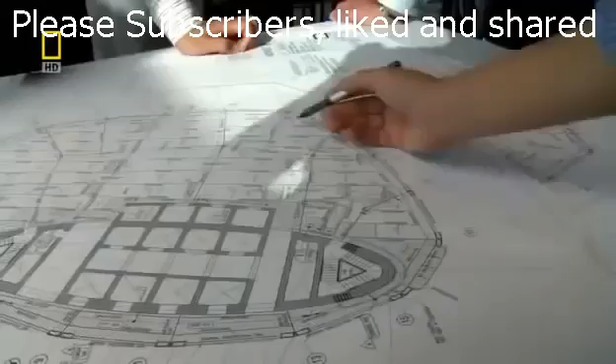Sheikh Sultan signs up a team of architects and gives them a clear brief, not to go bigger or taller, but to challenge the rules of architecture. For Neil van der Veen, one of the concept architects, it's a unique opportunity. The spirit of the times in the UAE was that anything was possible. Really, you could do anything. We can do something in the architecture that will represent that Abu Dhabi is right at the cutting edge.

The architects look for inspiration in Abu Dhabi's landscape. They find it in the wind-swept dunes and the rolling waves of the Persian Gulf. We took this idea of wind and water, which are both dynamic, fluid type of rhythms of nature, and we said, how can we capture those in time? As a result, you get a much smoother phase. I was really very happy when we first saw it, because with such a building, you get the first impression from the first few seconds.

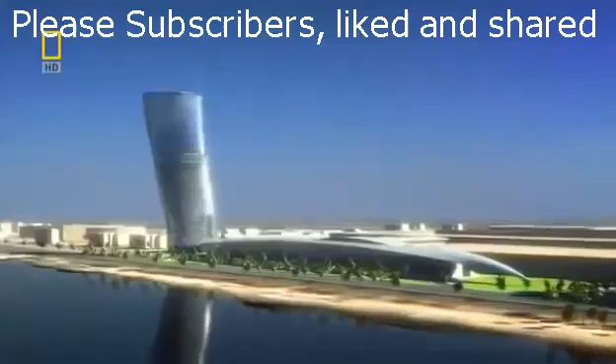The team come up with an extraordinary design. A tower that spirals out of the ground to 160 meters, inspired by a desert whirlwind and the splash of a wave rising over the sand. This gravity-defying skyscraper tilts almost 5 times more than Italy's Leaning Tower of Pisa. No single angle of this tower is the same as another. It's a structure guaranteed to amaze.

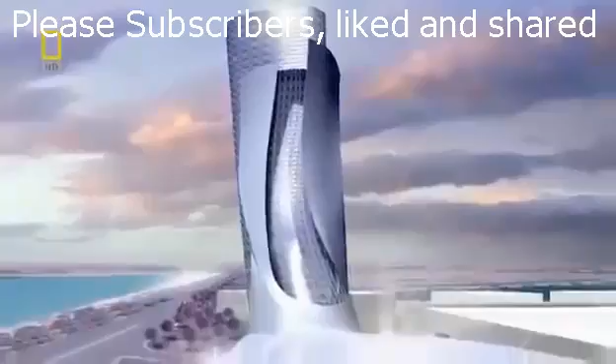We really wanted this to happen. They could see a vision suddenly. They could see something that would stand for them. Then there was no stopping us. Sheikh Sultan wants the lower floors to become the most prestigious office address in Abu Dhabi, with the top 18 levels assigned as a 5-star hotel fit for royalty.

But for maximum impact, this landmark skyscraper also needs a prestigious location. The Sheikh decides the tower will stand next to a monument of national importance, the grandstand. Built by his uncle and founding father of the United Arab Emirates, Sheikh Zayed, it's used to this day for national celebrations. This monument and the skyscraper will link Abu Dhabi's future with its past.

Over the past 50 years, this land has experienced extreme change like no other. The discovery of huge oil reserves in 1958 set the wheels of progress in motion. Abu Dhabi's ruler, Sheikh Zayed, had a vision to unify the sheikhdoms and secure their financial future from Western dominance. He then set about using his black gold to create a city that rose out of the desert.

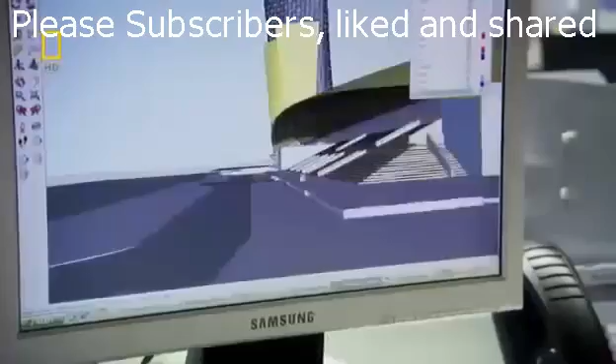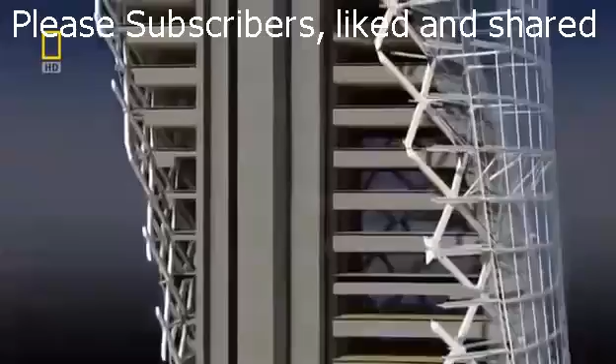Now, the idea must make the leap from the drawing board to the construction site. The only problem is, no one has ever attempted a skyscraper like this before. Everyone realized that this is a crazy structure to build, and how are we going to build it? To make Capital Gate's gravity-defying design a reality, it'll take some extraordinary engineering, and the challenge begins on day one. Its top floors overhang its base by 33 meters, creating huge forces that want to rip the building's foundations out of the ground.

At the construction site, project architect Tony Archibald is daunted by the task ahead. When I first joined the job, I was shown the drawings, and I kind of did a double take, and I wasn't quite sure that I got the correct understanding of the project, and it took me a few moments before I realized what we were about to undertake.

Keeping Capital Gate upright is a huge engineering challenge. There isn't just one solution. To overcome the forces of gravity, it will take a whole range of pioneering techniques. But the task starts with the foundations, deep underground. On one side of the building, the weight is going down into the ground. On the other side, it's being lifted out of the ground. And that's due to the large overhang that we're having to deal with.

The solution requires almost 400 concrete piles that work in 2 different ways. On the leaning side, half of the piles push the overhang's forces into the ground. On the opposite side, the remaining piles anchor deeper into the bedrock. They resist the stretching forces trying to wrench the building out of the ground. Finally, to evenly distribute Capital Gate's forces into the piles, a deep concrete slab reinforced with steel is laid on top. What the foundations taught us is that every single aspect of this building has to be custom engineered.

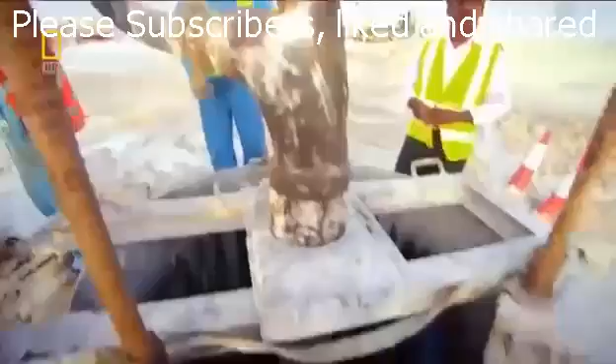Excavators dig out a colossal 6,000 cubic meters of sand. And over 8 weeks, hundreds of piles are driven into the ground. We had an awful lot of piles to put in very close proximity. It was a real difficult challenge. There can be no let-up on this schedule. Sheikh Sultan wants Capital Gate complete by an impossibly tight deadline.

In less than 2 years' time, Abu Dhabi will host the World Future Energy Summit. Over 3,000 delegates from 50 countries and the world's press will convene at the neighboring Abu Dhabi National Exhibition Center. It's the perfect opportunity to showcase Capital Gate and prove Abu Dhabi is at the forefront of innovation.

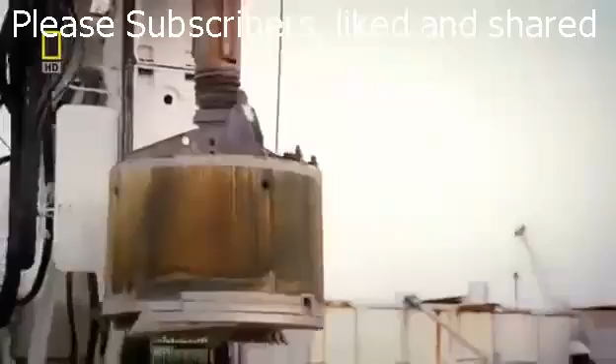But this gives the team just 24 months to design and build a unique skyscraper. With the foundations finished, building above ground can begin. But because of the dramatic lean, it will have to be constructed in a very different way to a conventional skyscraper. We realized once we'd done the foundations that this was going to be the first of many difficult problems. A normal skyscraper requires a solid core to hold it upright. But Capital Gate's curves will just crack and topple a standard core. Engineers must discard conventional thinking and devise a way to defy gravity.

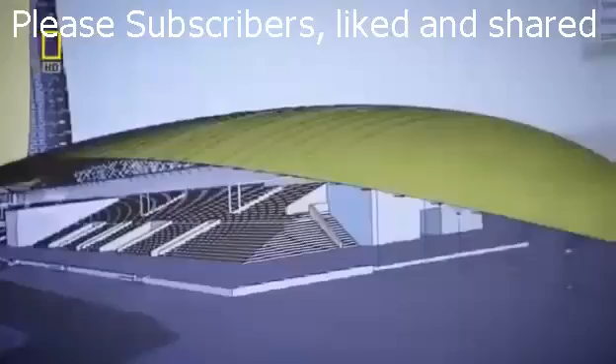Inspired by the nearby desert landscape and its wind-shaped dunes, architects have designed a curved leaning tower. But it'll take some audacious engineering to stop Capital Gate from falling over. Normal skyscrapers are built around a slim vertical core, which helps to channel the building's weight into the ground. There's so much overhang on this building that a conventional core was no way going to work. You just can't build a straight core. It's just not strong enough. Capital Gate's design would cause a conventional core to bend dangerously. The pull of the massive overhang wants to stretch the core on one side, causing the concrete to tear apart.

Structural engineer Mona Vassi knows it's a serious problem that must be solved. When I saw this one, I thought it's impossible, it's not going to work. It's just some sketch somebody left somewhere. But I always think that for the architects, it's easier for them to just draw something, but it's not easy for us to fulfill or satisfy their need.

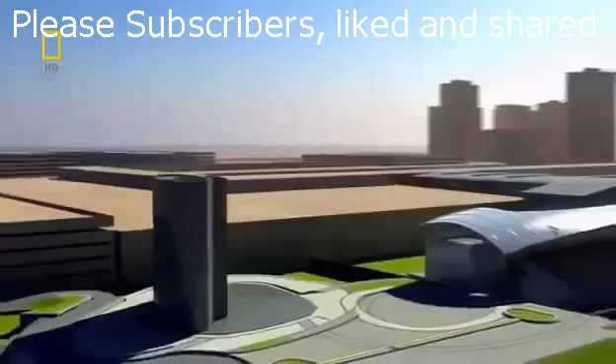The engineers developed two groundbreaking solutions. The first part of their plan is to build the core with a curve, bending in the opposite direction to the building's lean. As the structure grows, its weight pulls the core straight. In total, it shifts 350 millimeters, and the effect is significant. The concrete that would have been stretched by the overhang's pull will now be compressed and strengthened. You build it bent, and then as you add the slabs to the upper levels, it pulls it back into vertical. So basically that whole vertical core is in compression, and that gives it immense strength.

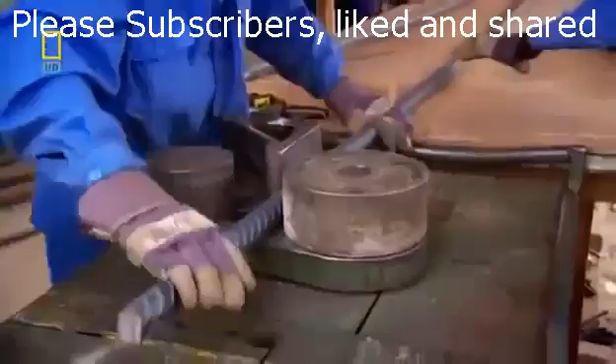The core grows 4 meters a week, and construction manager Les Fairchild is in charge of building it. This is probably the most complex core that I've come across. It's built at an angle, and effectively the core holds the whole building up. The core is built using a technique called jump forming.

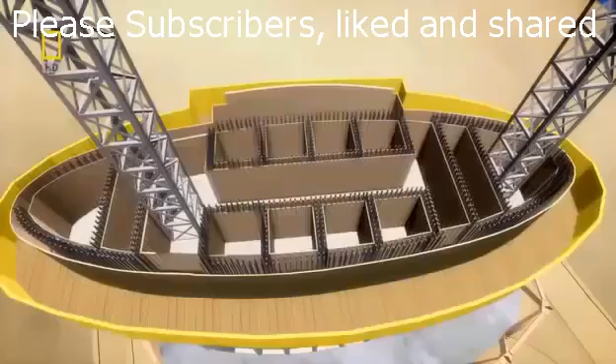First, a dense mesh of steel reinforcement is assembled. A mold then closes around the steel to form the shape of the core. The steel mesh is then filled with concrete. Then the mold or form can climb up the core wall for the process to start all over again.

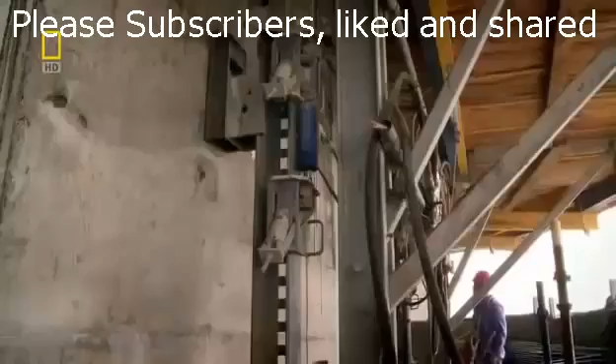Jump form is a hydraulic platform. Once we've cast each 4-metre level, we simply attach it to some runners and we jump it hydraulically up to the next level. The core will be strengthened as it straightens. But for the core to carry extreme loads, the concrete must be reinforced using steel rods called rebar.

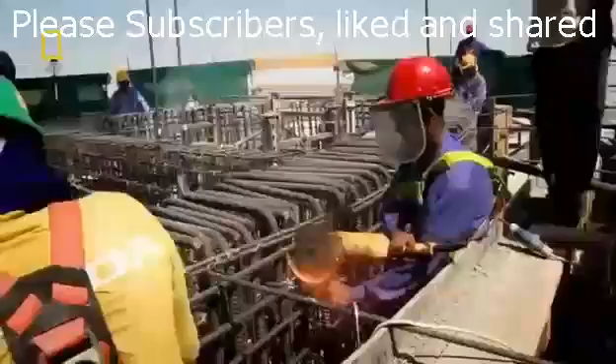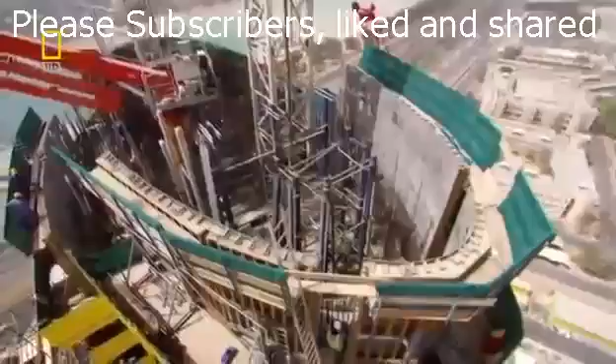The rebar is installed during the daytime, but temperatures of up to 50 degrees Celsius and concrete don't mix. It dries too fast and could crack. To set at the right speed, the concrete has to be poured during the cool of the night.

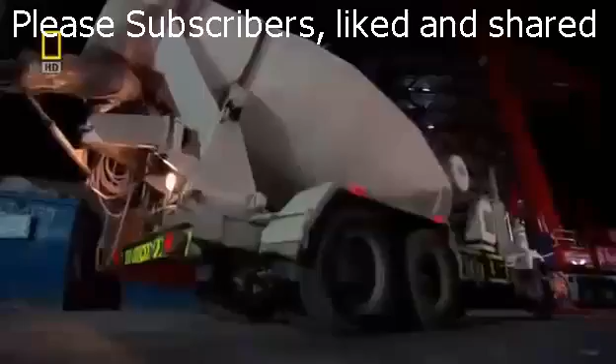As the core grows higher, the liquid concrete has to be pumped over longer and longer distances. So the consistency of every batch is first checked in a slump test to ensure it won't block the pipes. When you first see it coming out the wagon, you can usually tell whether it's a tight mix or whether it's a loose mix, and that's what we're testing for really in the slump test.

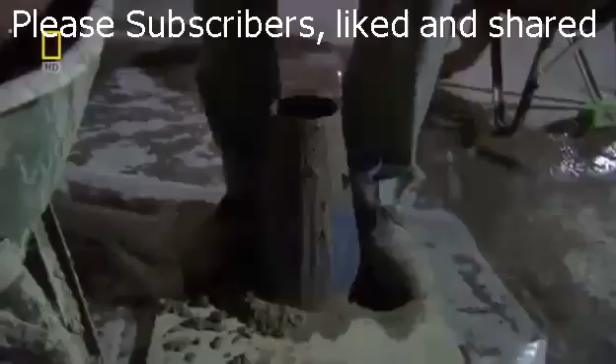We simply make a cone, lift the cone off, and depending on how much it reduces in height, tells you exactly what the slump is. The one we just witnessed is 215 millimetres, which is within the specification, so that's good to go.

Whilst the truck drives to the pump, Fairchild needs to get onto the core. He can take the stairs, but 90 meters up is a long climb. He knows a much faster way. Crane lift.

It's going fairly well. We've had a nice continuous supply of concrete, and we're now pumping it up to the upper levels of the building. And the lads are just steadily working away. They actually work from one side to the other in metre deep layers, so they're doing everything right. It's always exciting when we pour concrete. It means it's another achievement really. We're going up another level.

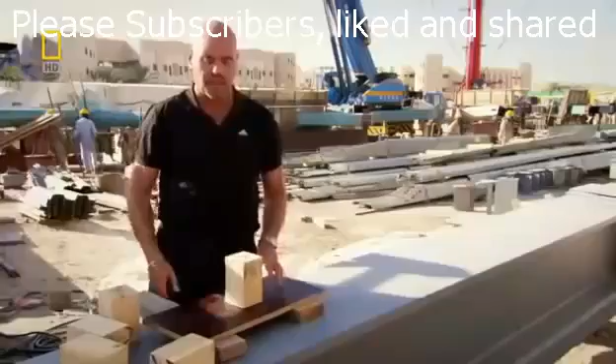But building the core out of alignment and packing it with rebar still isn't enough to stop gravity toppling Capital Gate. What we came up with is a post-tensioning solution where we introduced much more reinforcement into the core wall and then used the tensioning process. Basically that was done by introducing high tensile strands to the centre of the walls.

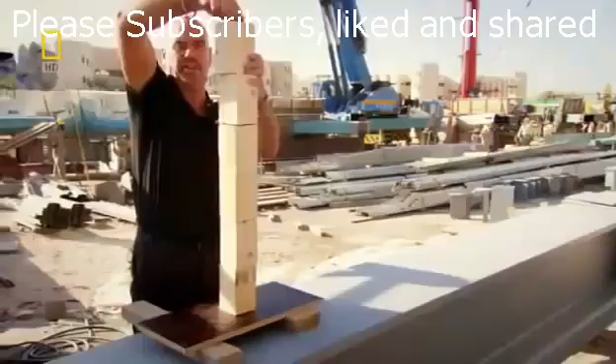When we reach the designated height, we simply apply tension. We're actually stretching the tendons that fall through the wall, and we're actually pulling them tight, and that's done by a tensioning machine. So effectively what you would have when the tension is complete, when the load was applied to the core, it would stay intact, and the additional reinforcement would prevent it from falling over.

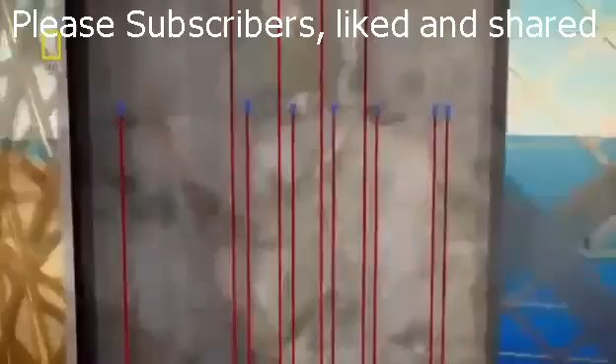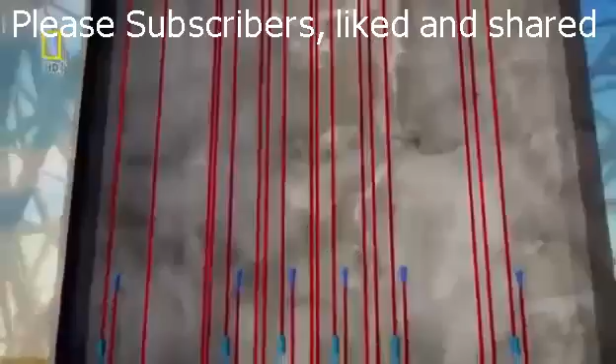To post-tension the core, 146 steel tendons are threaded vertically through the concrete. Each tendon is 20 meters long and runs through 5 floors of the building, overlapping each other for maximum strength. When the tendons are stretched, the stress counteracts the pulling force created by the massive overhang, stopping the concrete from tearing apart.

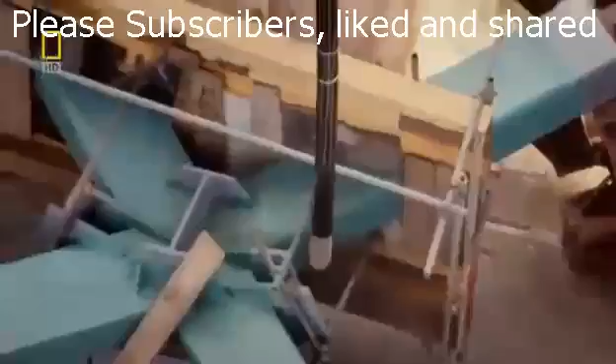On site, the team are post-tensioning the core, but no one has ever attempted this vertically in a skyscraper. The long tendon is lifted to the top of the core. The team used the steel tendon's weight to force it through a duct already cast through the core. Once the tendon is in position, the team lock off both ends, ready to tension its individual strands.

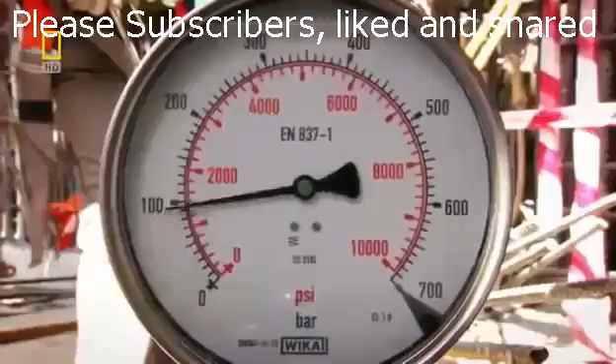Okay. A hydraulic jack clamps around one strand at a time and stretches it. It's equivalent to about 5 family cars pulling on one end of the rope. With the steel tendon now stretched to the right stress level, concrete pouring can continue upwards.

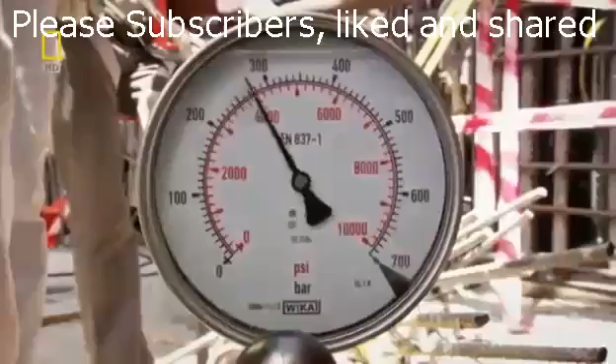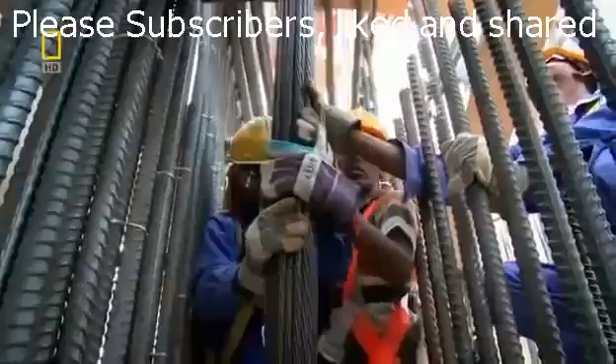The quantity of cable that's been used is approximately 120 tons and 120,000 metres in length. It's about 44 times the Golden Gate Bridge. This process is repeated over and over and means the core should withstand the huge loads generated by Capital Gate's extreme overhang.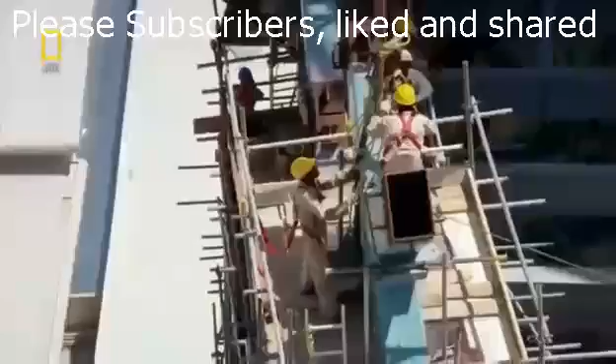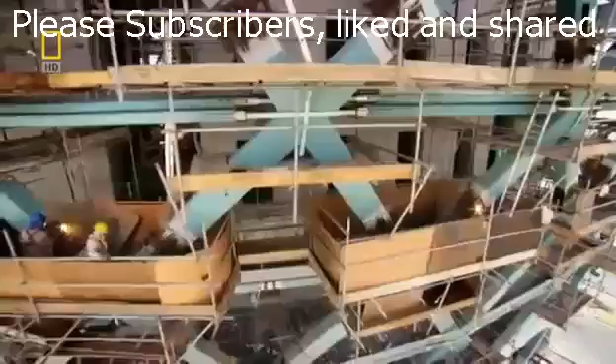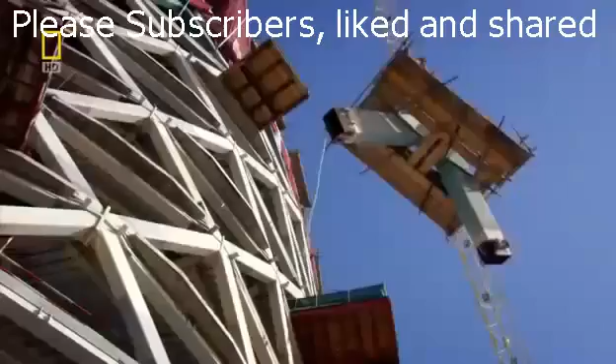But now, an even greater challenge must be tackled. The building's twisting, leaning design must somehow be turned from theory into reality. And once again, it'll mean bending the rules of architecture. To create Abu Dhabi's architectural icon, Capital Gate needs an exterior curved leaning frame. But once again, the building's extreme tilt creates a problem.

The shape of the building with this very pronounced overhang meant that traditional skyscraper building solutions just weren't going to work. There's no way. The building design requires it to be thin to maximize floor space and allow for huge panoramic windows. Irfan Ahmed is one of the engineers who has to find a solution. For structural engineers, always it's challenging to accept the architectural requirement, you know. They always want thinner and thinner and thinner.

Surprisingly, the humble chicken could help with this engineering dilemma. It is essentially a skin of structure around the outside of the building, not unlike an egg. An egg can withstand huge loads because it evenly distributes forces down through its shell, which means the shell can be thin, creating more space inside. So it's very, very thin, it's very, very strong. If I try to crush this egg, you can see that it's actually amazingly resilient. So let's see how resilient.

Here I have 170 eggs laid out, and we're going to put load on top of these in the form of breeze blocks. Moment of truth. So far, so good. Each one of these blocks weighs 15 kilos. So we've nearly got half the weight of a car on here now, on our 170 eggs. Let's see how far we can push this.

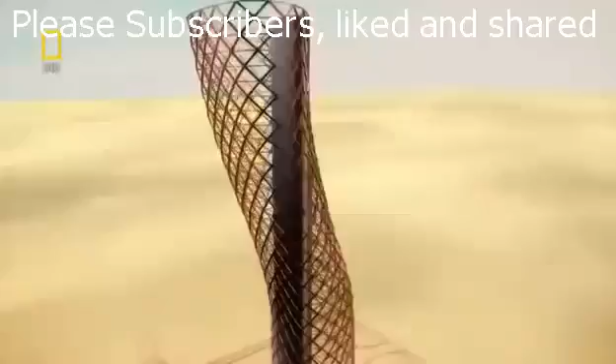Capital Gate can't channel forces with eggshell, but it can use the principle of how it works, using a diagrid. A diagrid is a giant mesh of steel that wraps around the core. Steel beams connect to a node or joint to form a cruciform section. 720 uniquely shaped sections link together to form the thin but immensely strong diagrid. Working together, these cruciforms equally distribute the forces down the outside of the building. The way it does that is by making a uniform net, so that the forces are very evenly distributed, and that means that we can get away with slenderer sections.

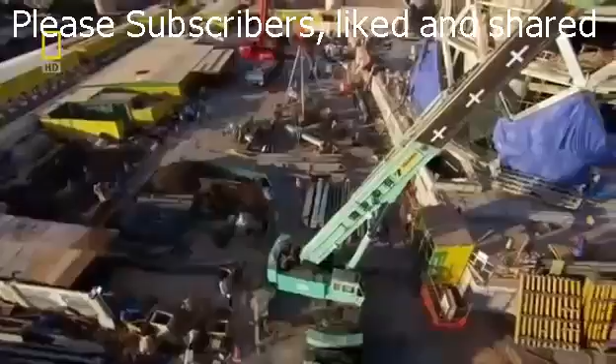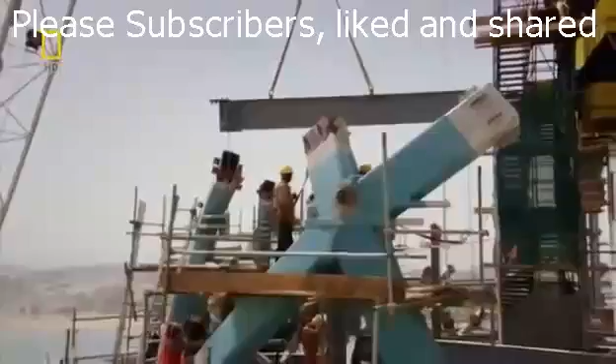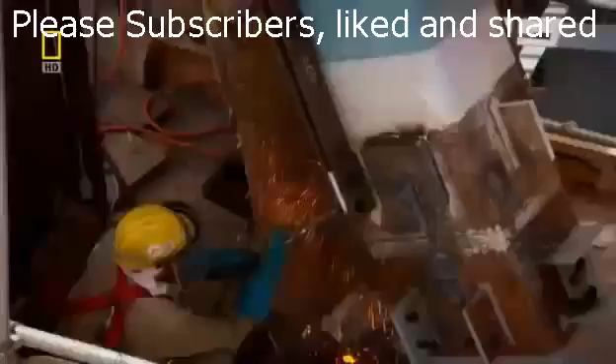On site, a team of 240 steel fabricators assemble the diagrid. They've built the easier straight part of Capital Gate's base, but now the structure is starting to lean, making installation even more challenging. Each cruciform, weighing up to 16 tons, has a unique geometry and must be crane lifted at a precise angle. If the diagrid is not assembled with millimeter accuracy, the mesh will not channel the loads and the structure could be weakened.

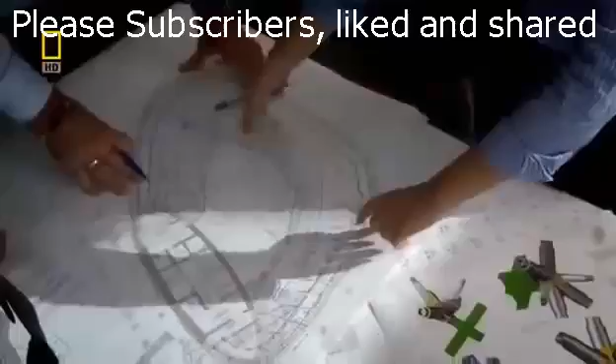The engineers must communicate closely with the expert steel fabricators. They design and manufacture the diagrid 150 kilometers away in the neighboring emirate, Sharjah. Here, cutting-edge construction is the norm. They've built one of Malaysia's Petronas Towers and Dubai's iconic skyscrapers, the Burj Al Arab and the Burj Khalifa. But Capital Gate's revolutionary design pushes even these experts to the limit.

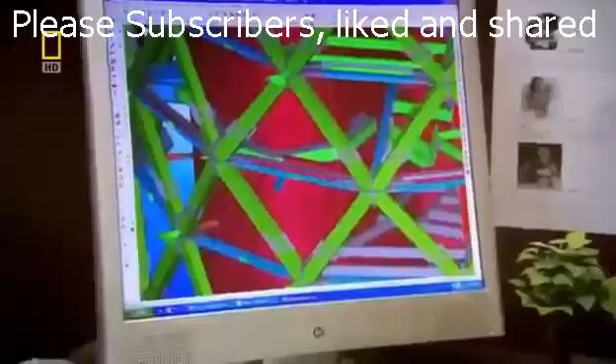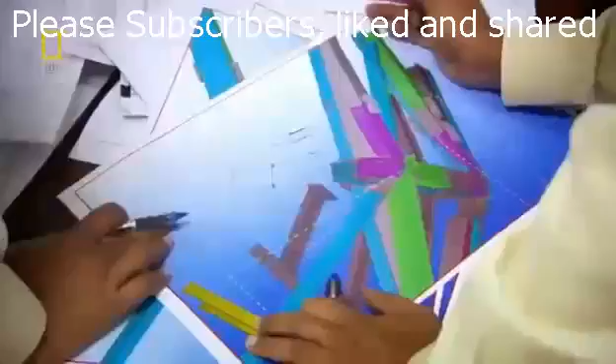On the planning floor, project engineer P. Bhaskaran and his team need bespoke 3D software to tackle the building's highly complex diagrid. The 3D modeling is done, and any unforeseen criticalities will be very clearly identified in the 3D model. Each one of the 720 cruciforms is precision engineered, not only to channel huge forces, but to connect with millimeter accuracy to the neighboring cruciforms and the glass facade. But to measure their exact angles, the team used some old-school technology: chalk. It might look unsophisticated, but it's highly accurate, ensuring all the elements will join together.

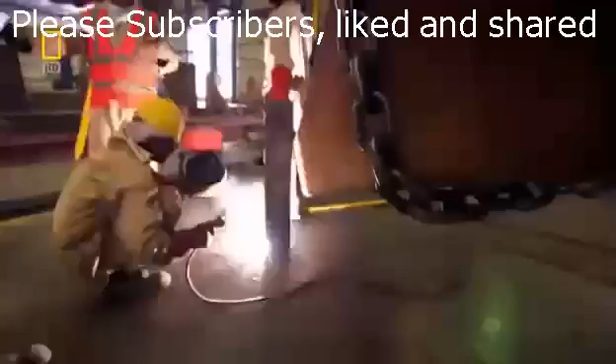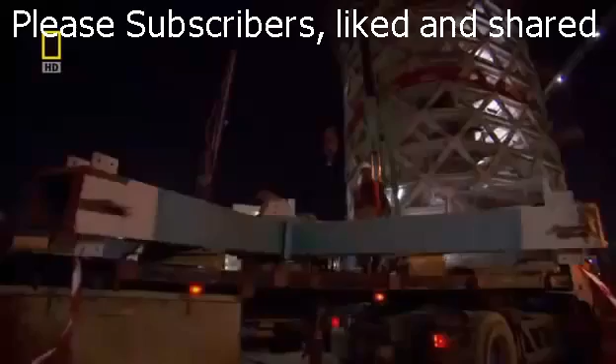To keep up with construction, the factory must produce 18 cruciforms every week. Constructing such a huge building, a critical building within the short span, without working 24 hours, it is absolutely not going to happen. As the skyscraper reaches new heights, the long hours start to pay off. This design pushes the diagrid technology to its absolute limit, and in fact far beyond what's ever been achieved so far. Even in your dreams, you're thinking about this project. So once you see the structure coming up, you forget all the long hours you spend and all the sleepless nights.

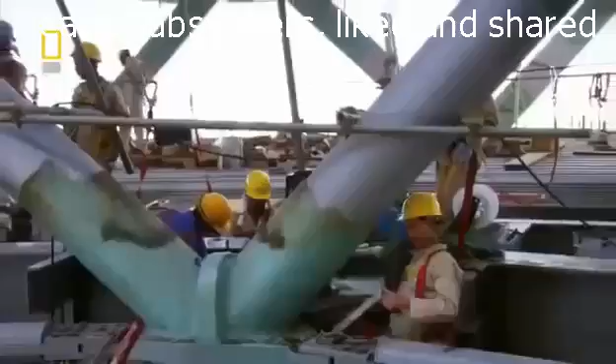A colossus is fast emerging from the Abu Dhabi sands. Now, this leaning tower must be clad with a glass facade. And as always with this gravity-defying structure, it's going to require some revolutionary engineering.

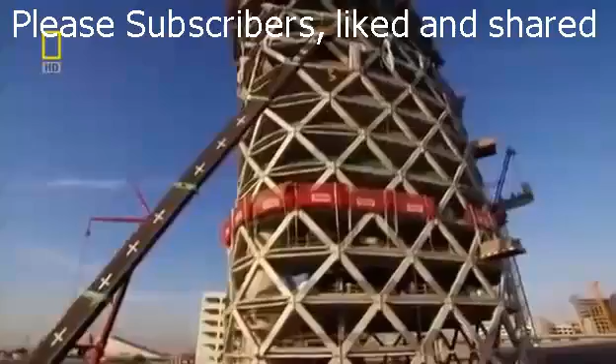Glazing Capital Gate's leaning curved frame is a major problem. Covering its unusual contours with curved glass will blow the budget. So the skyscraper's curves must somehow be clad using cost-effective flat glass panes. Fortunately, ancient Greek geometry can help.

Because you've got a complex shape, it's an organic shape, it's a curved shape, the only way to model that with straight lines is to use triangles. Triangular panes can pivot in 3 directions, and when joined together can cover complex geometric surfaces. But because every angle of the building is unique, it'll take 26,000 triangular panes to form the facade.

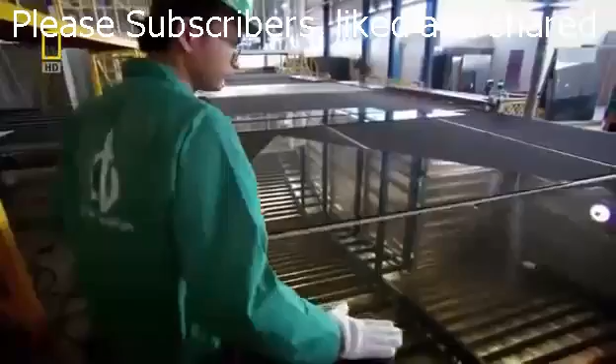With so many glass triangles to cut, the local glass factory springs into action. Each pane is scored by an automated diamond cutter to an exact pattern. The triangles are then sent along the production line. The team is under constant pressure to deliver enough glass to the site.

Hey, this side, you guys, hold it.

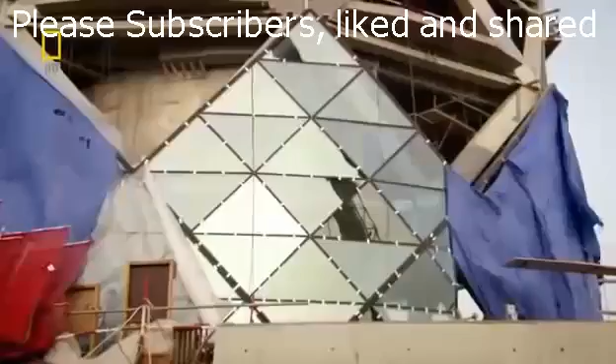After several weeks, 8 diamonds are in place and another 100 standing by. But the glass design is so unconventional, it still has to pass a number of tests to prove it's up to the job. Because we'd already started the glass installation, the results of this test were absolutely key. Each panel is stacked one upon the other. So if we'd had any kind of problem, we would have had to unstack them, which would have had disastrous consequences for the program.

This is no ordinary glass skin after all. Capital Gate's core straightens as it grows. The skyscraper will not stop moving until after completion. Normal glass facades can accommodate minute movements caused by wind and temperature changes. But to stop the glass shattering and keep the building watertight, the panels must be designed to shift by up to 20 millimeters. The scale of that kind of movement is almost unheard of in glazing systems. It's a vast amount of movement.

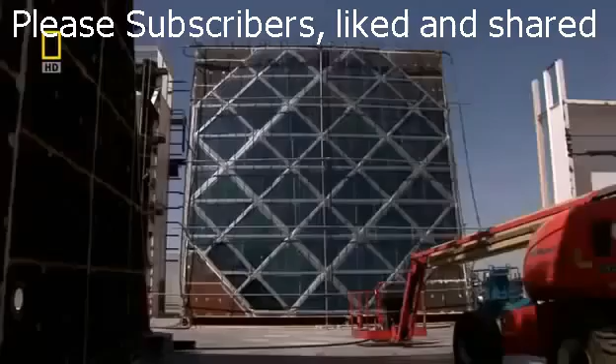With glass installation ongoing, construction manager Craig Rooney needs to know the panels will perform. We don't want to get to the top, we've done it, we've installed it, we think we've done a great job, and then it all leaks. The panels must be tested to the limit at a Dubai laboratory. A plane engine and many liters of water simulate worst-case scenario weather.

Now the moment of truth. Any leaks could be a disaster. And it's bad news. The first time we got a full water test, we had a leak. The fact that we had a leak was devastating to the whole team and very alarming. The diamonds connect to each other by a bespoke two-layer seal. The flexible spongy seal allows the diamonds to move and keeps water out. But if any water does seep through the outer seal, drainage tubes fitted at intervals let the water flow away.

The panel has failed the test. Water has flooded inside and penetrated the inner seal. If it was a fundamental failure, we're back to the drawing board, so the cost and the budget and the program all go completely out the window. The panel is examined. Answers are needed fast. Fortunately, it's not a design failure. They discover a drainage tube is only blocked with sand. The problem resolved, installation can step up a gear.

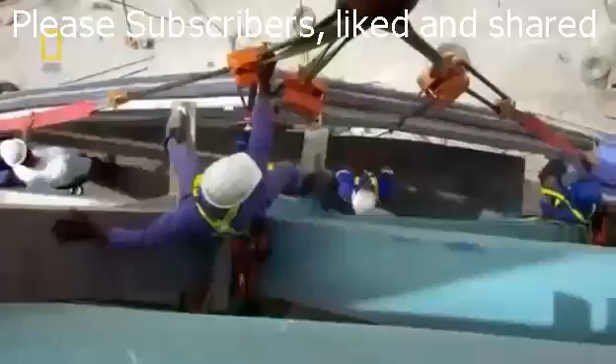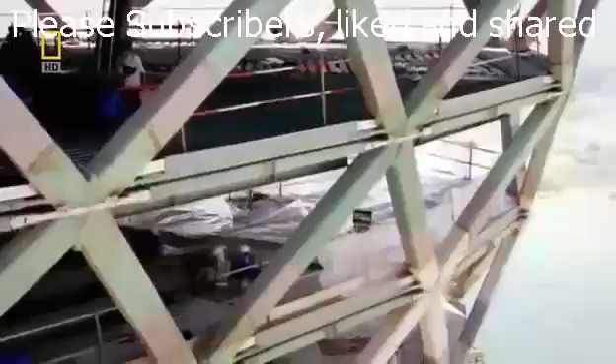But as always with this audacious building, one problem is solved and another is just around the corner. To give Capital Gate's five-star hotel lobby the wow factor, architects again plan to push the design to the extreme. Now they want to build an infinity pool and a restaurant, hanging 100 meters above the ground.

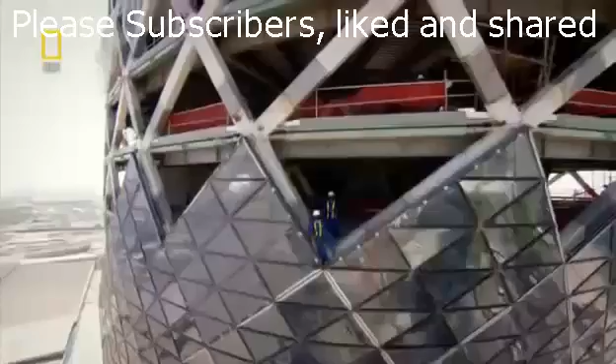18 months into the build, Capital Gate's design is about to give a new slant on high-rise living. The architects want a pool deck and restaurant suspended in the sky, but it's an engineering headache. There's so many requirements that architects have that really put us in so much trouble as engineers, but you want to make sure you have a safe structure.

The design calls for a two-story extension, hanging without any visible support. But the pool's water alone will weigh 150 tons. The structure's huge mass means it needs reinforcement. We needed some supports from below, otherwise there was no other solution. I don't think you can have a cantilever that huge on this building, no way. The design will only work if it's underpinned with 22 steel struts. They will carry the loads back into the building. But the struts must also look delicate to meet the architect's aesthetic demands.

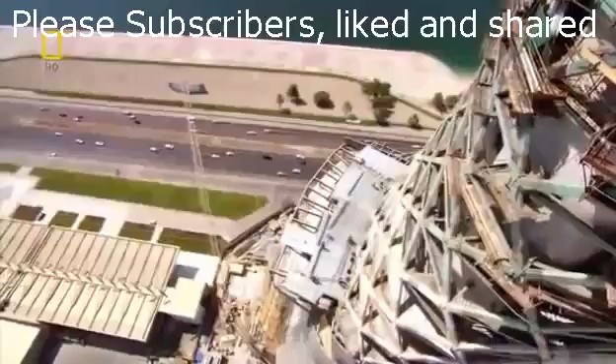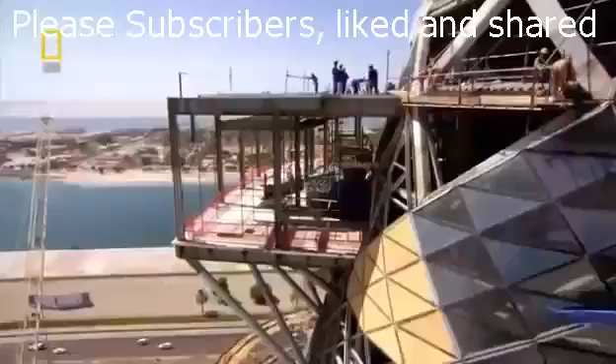On the construction site, 90 meters up, the pool and restaurant is taking shape. All of its structural elements are in position, except one. The team are raising its last 6-ton floor beam.

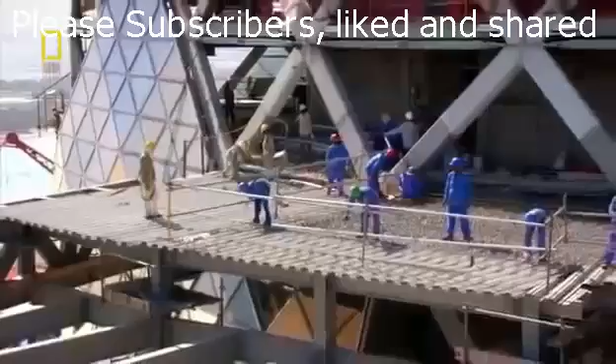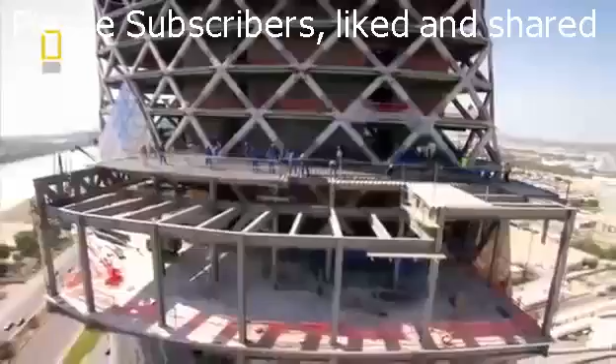It's taken many crane lifts, but one of the highest suspended swimming pools in the world has made the leap from blueprint to building. See all those lines that you just drew? They're actually drawing the same thing for you, but with a crane. But the feeling is indescribable.

And the structure's muscular struts and connections are also elegant. The idea behind these junctions is that they behave like the insects that can walk on water. They're sufficiently light that the surface tension keeps them above the water. So these little brackets dissipate the forces from all that weight.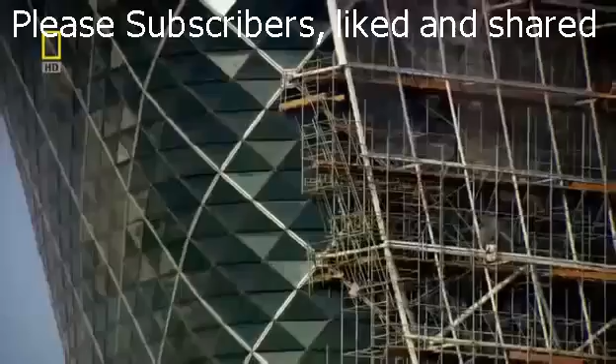Capital Gate is fast becoming an Abu Dhabi landmark. But the taller it gets, the more the weight of its upper floors is a problem. The skyscraper needs to go on a diet. And this time, the architects come up with a clever solution. The building has lots of visual surprises.

And one of the most important ones of those is the internal atrium. It's a kind of a light well that brings light from the sky deep inside the building, and it extends over half the height of the building. So it starts out very, very small at the bottom and opens out in a big funnel. This cavernous hole is good news for reducing weight and minimizes forces.

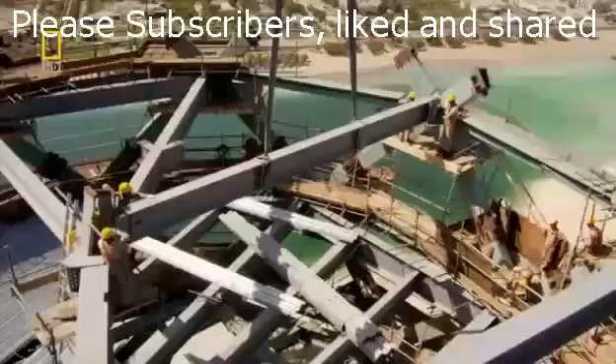But the atrium is a double-edged sword. The floors are critical in transferring loads from the diagrid to the core. A giant hole through 18 floors means these loads must find another pathway. It's a very, very big hole in every single floor plate. So our engineers really had their work cut out.

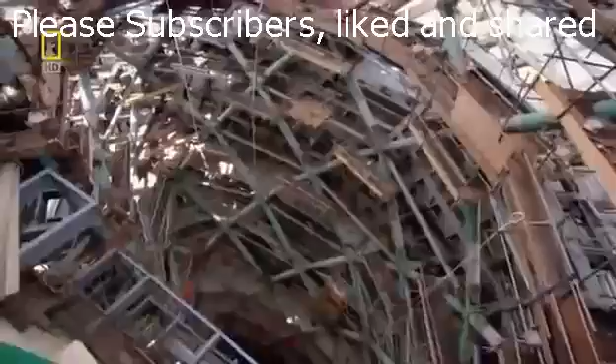You don't want to have an opening in your floor. You want to have more concrete, reinforced concrete, to transfer these forces. The forces need to flow away. And the solution is pioneering. An internal web of steel mirroring the external diagrid. This is the first time we've ever heard of this being done.

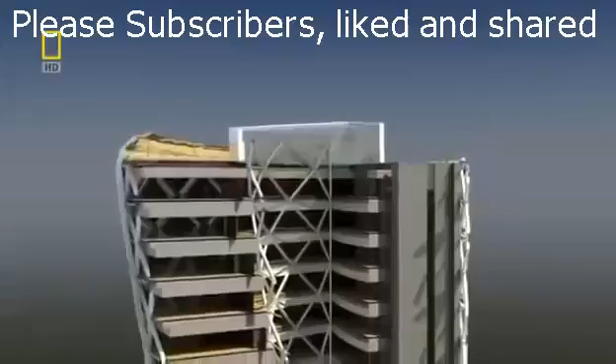The internal diagrid is actually a fundamental part of the structure. This funnel-shaped internal skeleton carries the forces of an 18-story building down to its tapered base and into the core. But the loads are extremely high for such a small area. To stop the atrium punching through the core wall, the concrete needs protection.

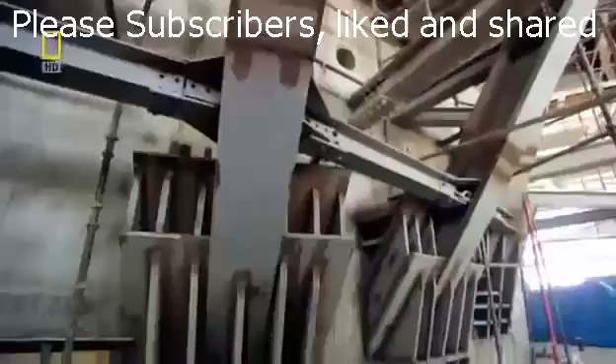The answer? 6 giant plates of steel that brace the connection to the core wall. The connections are really a wonderful, wonderful piece of engineering. They're 8 meters high. They span 2 floors, and they connect back into the core. The atrium's near completion brings Abu Dhabi one step closer to achieving an iconic landmark.

But as the sun goes down, this isn't the only celebration underway. On site, the Indian steel team are holding an annual blessing to the Hindu god Lord Vishwakarma, the protector of architects and engineers. Their livelihoods depend on staying safe, and although they use safety equipment and are highly skilled, working with huge sections of steel at height is never risk-free.

We pay our respect to God and get the blessings from the God. We do that for the safety of all our workers and for the proper completion of the job. Every trade of workers we take, the basic tools they are using on site, that has to be kept in front of God, and the workers feel themselves that they are in safe hands. The tools are now blessed, and the steel team's morale is high.

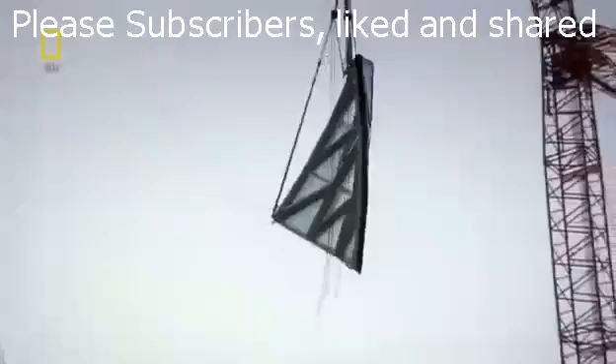Meyer has to act quickly, or this 4-ton diamond could smash into the building. Not for the first time, lifting glass is delayed by changeable weather. At this rate, Meyer won't install the remaining 107 panels in time. But Abu Dhabi's wind isn't the only problem the Capital Gate team face. A last-minute design request comes in from the Sheikh's office that could have serious implications.

With just 6 months to go to completion, the Capital Gate team should be on the home straight. But those plans may have to be put on hold. I had a telephone call saying that we had to put a helipad on the roof, which I didn't think was a joke, but I was astounded that we got this at such a late point in the project.

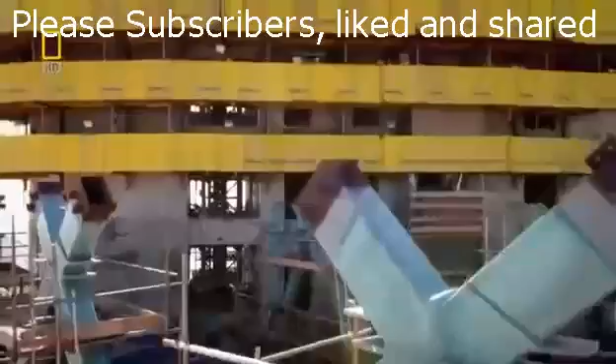Integrating what will be Abu Dhabi's highest helipad atop one of the world's most daring skyscrapers at first seems a simple request. But it actually poses 2 serious problems. It'll create new forces that must be absorbed by the already strained core, and unpredictable wind flows that can cause potentially lethal flying conditions. You get a thing called wind shear, tipping the whole helicopter onto its side, and this is a very real and very dangerous risk.

These rapid wind changes, known as wind shear, can affect the lift on helicopter blades. Aircraft can be blown off course, or literally fall out of the sky. There is no way that we could have any margin of error on the safety. The only way we could predict what the wind shear would be like on the top of the building was to model it in a wind tunnel.

But that's not all the wind tunnel test reveals. Wind impacting the helipad is also creating huge suction forces. We're talking about very large forces here wanting to pull the helipad off the top of the building. Something in the realm of several large trucks or big rigs trying to pull this helipad away.

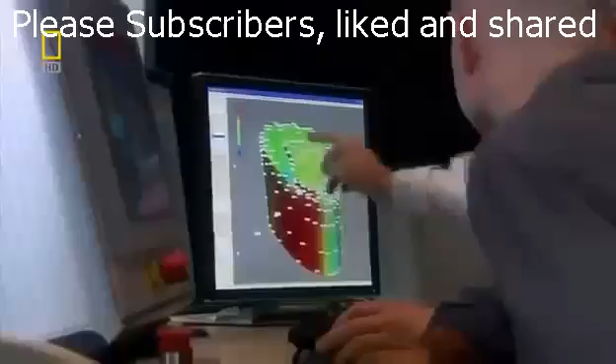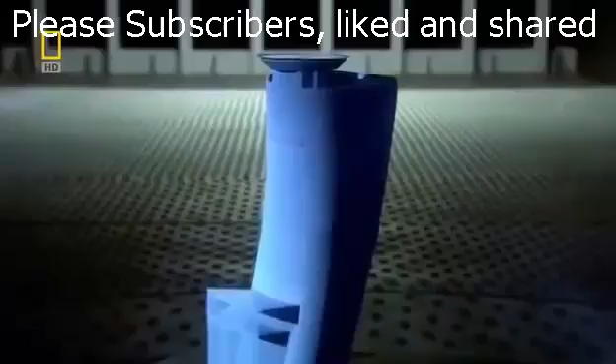To make the helipad safe, Aurelius and his team have to go against conventional thinking. We didn't think that lowering the helipad was actually going to be the optimum design, but we see reduced loading on the helipad as well as safer conditions for the pilots to land in. Lowering the helideck to just 2 meters above the roof dramatically decreases the wind shear threat, and means Capital Gate's core will withstand the additional loads.

We're relieved, frankly. The tests have actually confirmed now that we can have it in our original design position, which is very low, which will mean that the profile on the skyline is exactly where we want it. But it'll take another 5 months to just draw up the helipad's blueprints, and a crane must be left behind to build it.

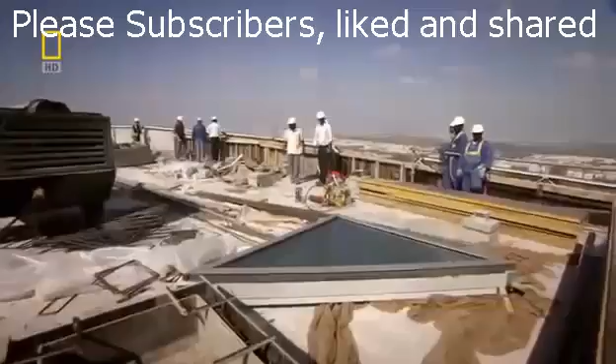Now, with only weeks to go until zero hour, the team are installing one of the last glass panels. It's a moment that once seemed a long way off. In my office I have a plan of all the diamonds we have to install, and in the beginning it looked like I'm in jail and I'm marking the wall with marks for each day. And so at first I felt I will never finish this project. Just 10 months since the first diamond was fitted, the facade now shimmers in the sun.

Capital Gate's internal fit-out will take another year. Only then will its 5-star hotel and Abu Dhabi's most unusual office address be open for business. But against the odds, the team have created one of the most extraordinary megastructures on the planet. Capital Gate twists and spirals out of the ground, soaring to a full 162 meters. It's taken nearly 6 million man-hours to construct, and its overhang is spectacular. You see the building and you stand underneath the overhang. It's extremely impressive. It's a fantastic feat of engineering.

I feel as though I've been here an eternity, but it's probably been the quickest 2 years of my life. It's been an amazing journey and we've learned so much. And actually I think we've demonstrated that some things that looked impossible or even ridiculous were actually possible. And Abu Dhabi's past will soon be physically linked to its future by a wave of steel that'll rise over the grandstand and splash up the skyscraper's mirrored glass.